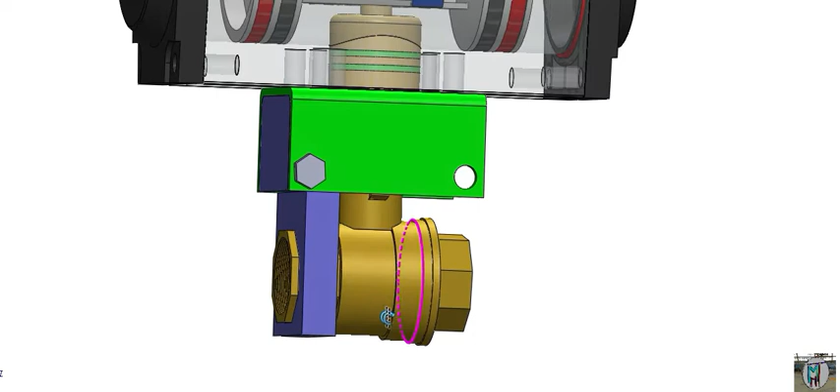Hello everybody. Last time we told you about one system of your valve, how to rotate the valve. We are talking about this valve. Last time we described all functions of this valve, and basically we use this valve in our PU machine. So now this valve will be rotated by one piece of equipment. We call it the blow down valve. You can see here, this is the blow down valve.

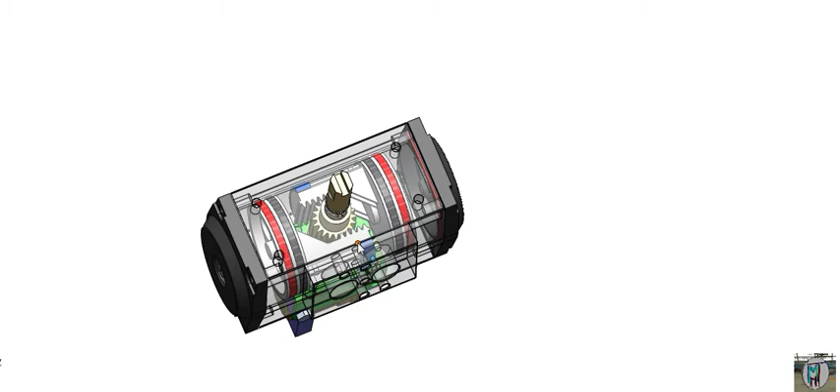When it rotates, now this is the perpendicular condition, 90 degrees, so at that time this valve will be closed. It will be rotated, so at that time you can see that your valve is opening there. So when it rotates, it will open and close like this. When air enters here, at that time it will work.

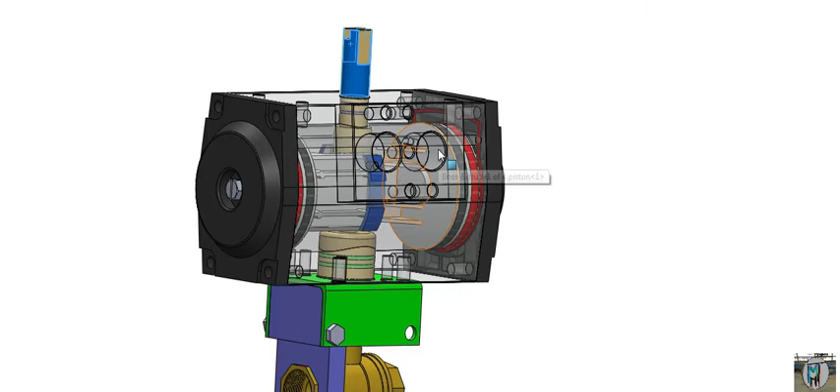So there are 2 points, one incoming and one outgoing, and also A and B points like this, if you know about the pneumatic system. The pneumatic valve we have already described in our previous video.

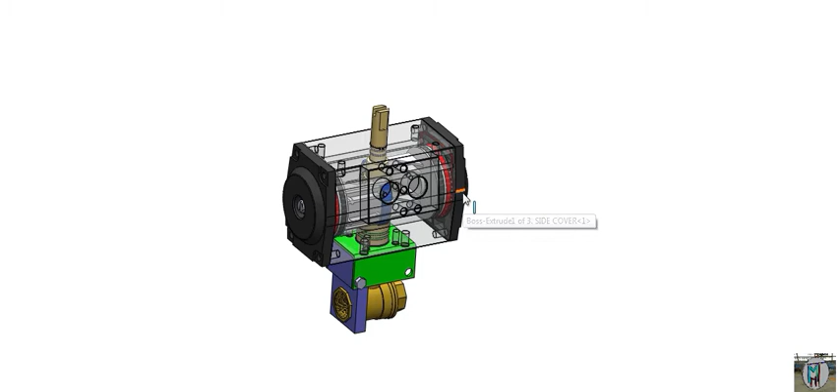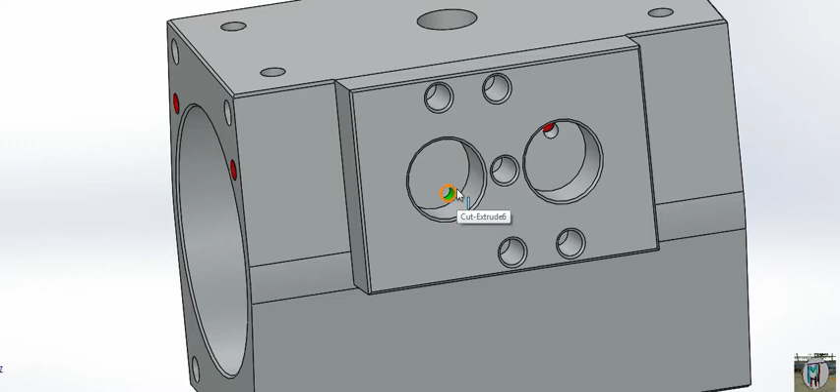So now we are starting here, this is the valve. How it will work, we will tell you now. This is the body of it. You can see this is the green signal, the A and B part where we will attach the connector through one pneumatic valve here. So this green signal is coming here. You can see that at the bottom, and also the red color.

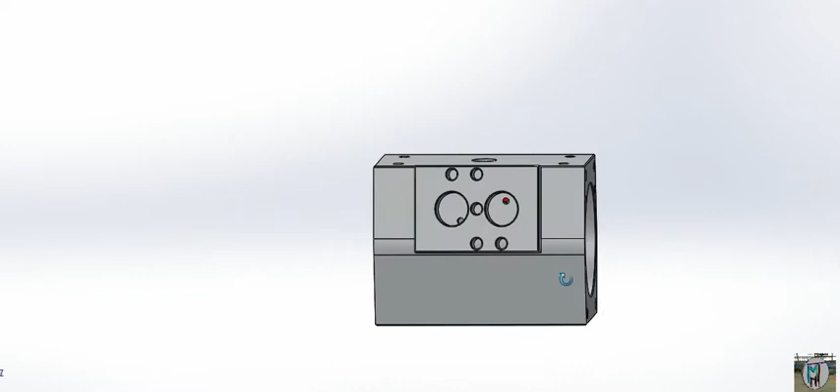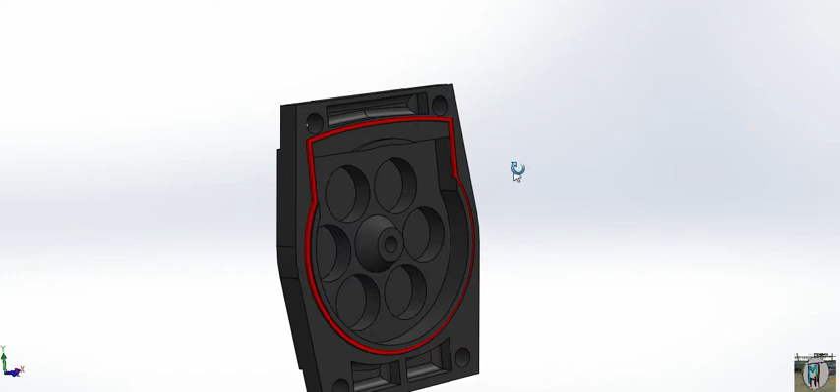So red color is basically the path. On the other side also you can see it goes throughout both sides. So when we give some pressure here, that pressure will appear on this side and also this side. This is the side cover of our blow down valve. Because this is the depth here, that gap here, when the red side is operated, air will come through that hole, it will appear here, and the pressure will build here.

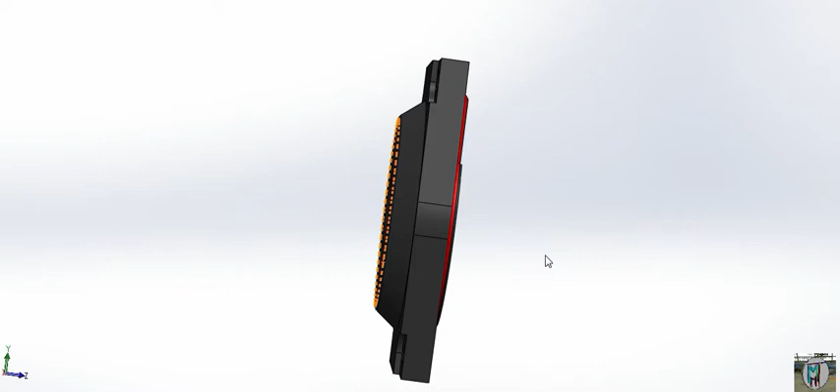And this hole is for adjusting. We will fix one bolt here to adjust our 90-degree angle, to stop, to set how much we want to open our valve, so we can set it through this bolt. Here we have fixed this bolt, you can see. Now we will start here.

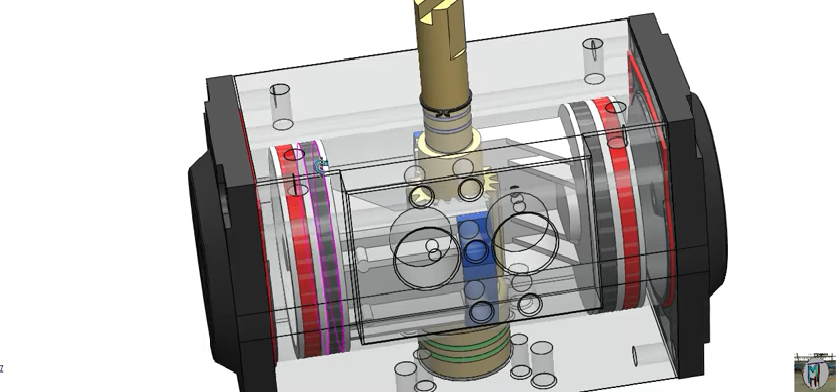So when pressure builds, suppose now the red color, this is the right-hand red color. So this is the ring and cylinder. You can see that this is the cylinder, and this is the ring and piston, like the way a pneumatic cylinder works. We already described all of it in our previous video on the pneumatic cylinder. We will give you the link also.

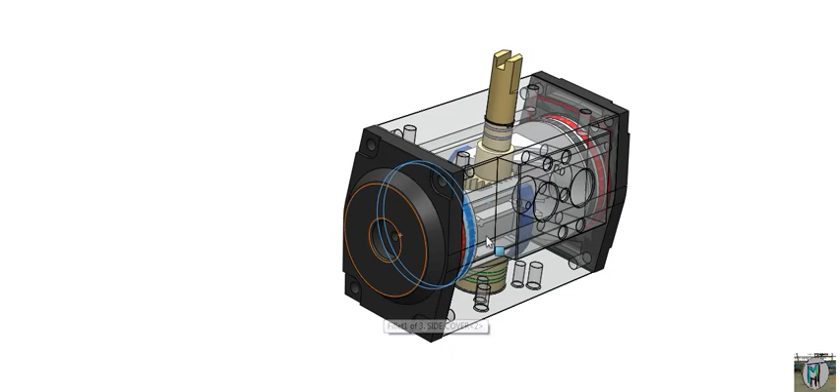So when pressure builds inside this portion, air will come and press this portion, so it will go inside, because the green point is here in the middle, so air will come through this. The air inside will go outside. When we give the pressure on this side, it will go outside. We can set the bolt. I have told you how much we want to open, how we want to rotate this, how much degree of rotation we want.

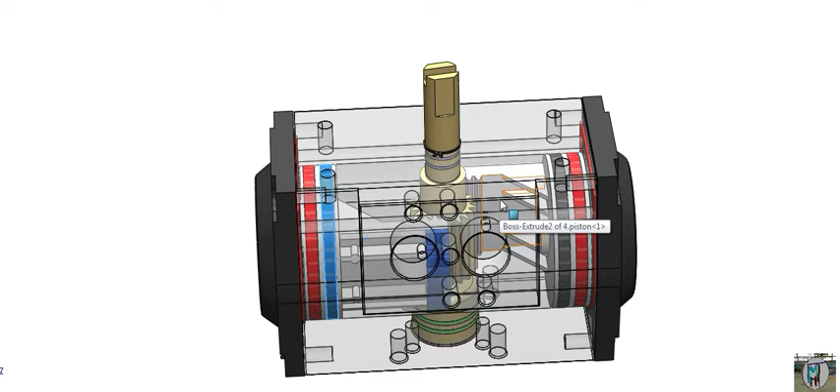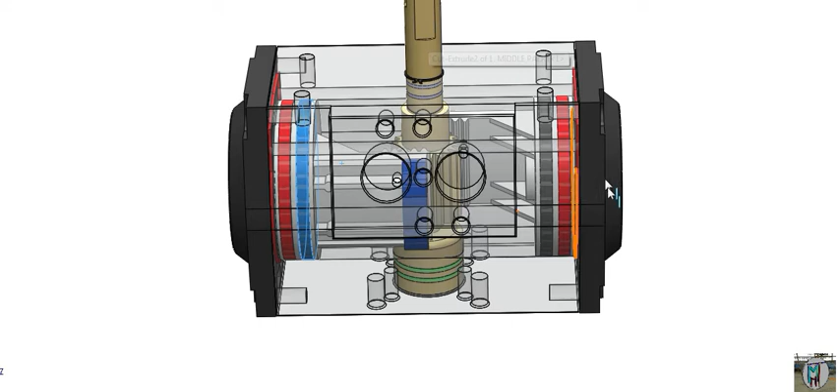And here you can see the rings are inside. Suppose your ring is damaged and air is coming here, you have to open only this and you can change the ring here. Also two rings are on the bottom side, where we will fix one coupling, so the ring is here also, so air leakage will not happen here. So when we give the pressure inside, it will rotate, and when we give the pressure on both sides, it will rotate through this piston also.

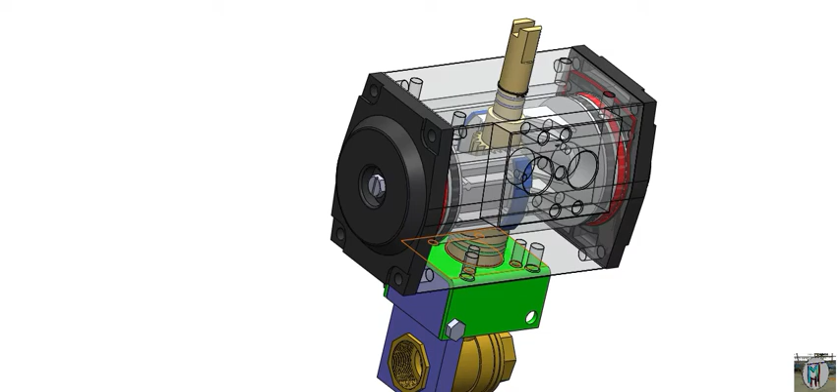So that is working only so that we can see here whether it is rotating or not rotating, so that this is working or not. Now we have fixed this fully with the support of the plate, and here you can see one coupling here and the valve, this is the valve.

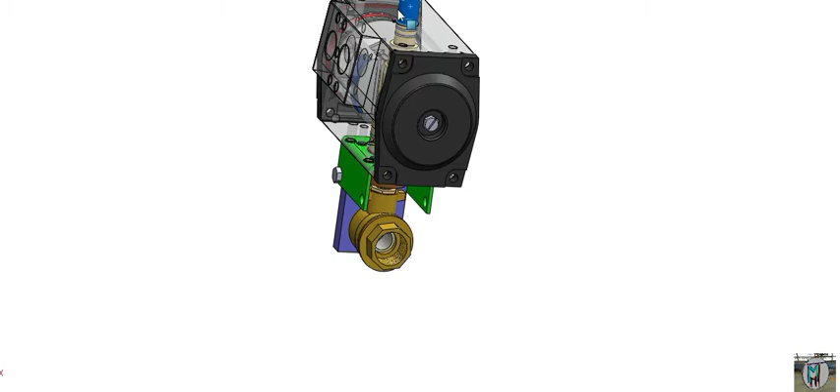So when we rotate this, you can see that this is going closed, and when it goes this way, it is open. At open time, it will be straight on this side. This means that this is open. When it is closed like this, at that time it is a cross section, meaning 90 degrees, it will be closed totally. So basically we use this valve in our head, the PU machine head.

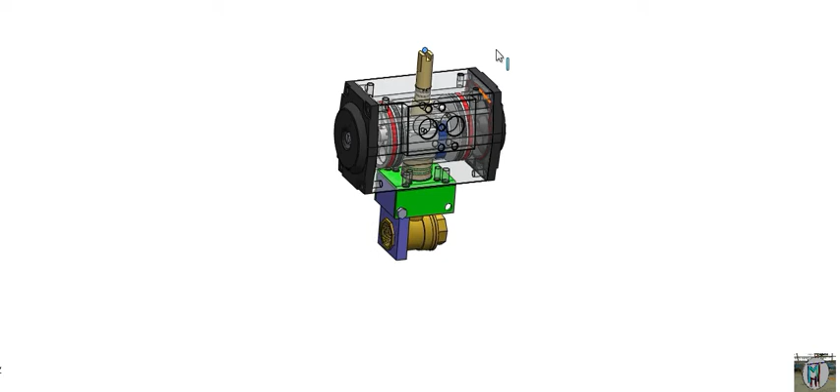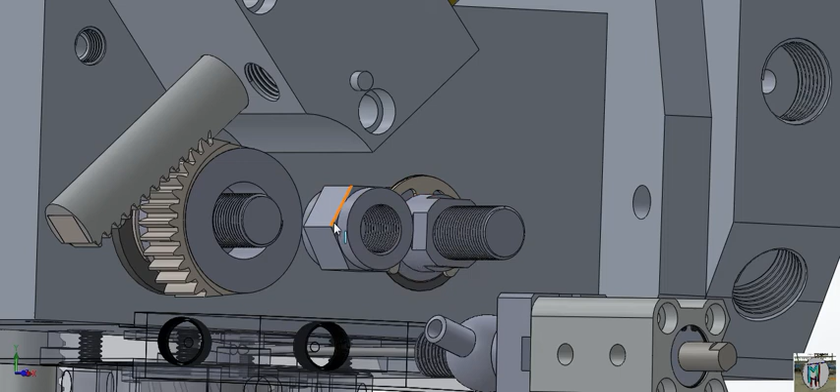So three of this type of valve we put in series, so that we get some chemical from that valve here, MCL valve, NRV. In our previous video we already described this NRV, with the ball inside, so when pressure comes here, the ball will move inside and your chemical will enter inside the head to clean your head.

What is the need of this? Suppose black color is running and you want to start your white production or brown production, or you feel that your cup or your product is not coming out very well, quality is low, then you need to clean after every round, after every 60 rounds, to clean this head, because iso and polyol are mixed here, so you need to clean that. So MCL will be cleaned with air pressure, so we need this.

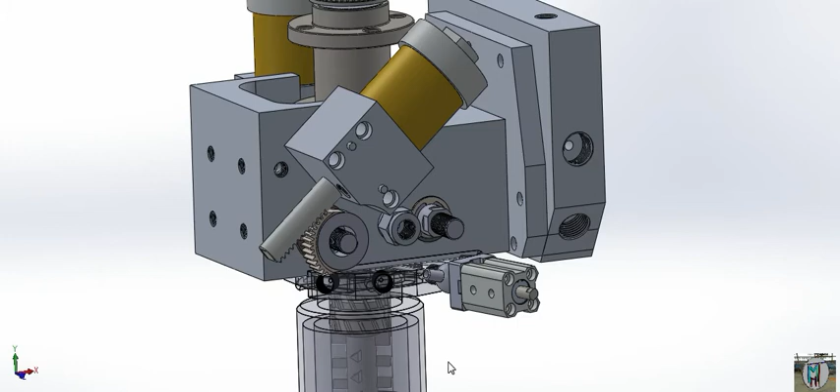So you have to watch this video also, and here you can see that this point will meet with the head. The chemical will come here and go to our head. What is the purpose of fixing this one? Because this is pneumatic based, we will fix our pneumatic valve 1 or 1.5 meters distance from this. When current enters the valve, the current will not be directly in touch with the chemical. Only our air pneumatic pressure is rotating this valve.

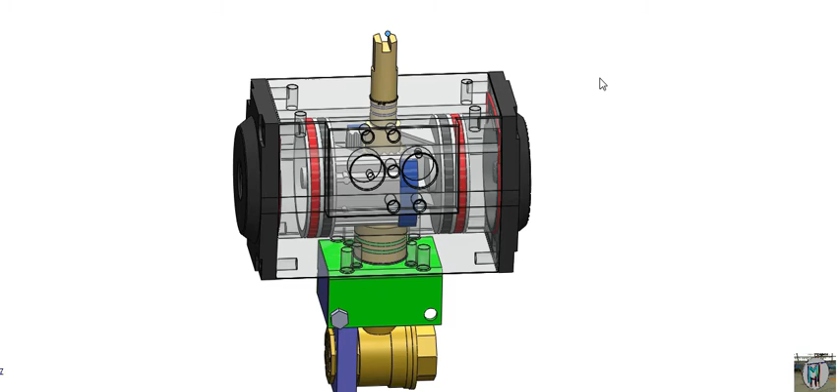So this is totally a safety point. The chemical is not in touch with fire or some spark or some voltage. So that is the benefit of this. This is the precaution when we use chemicals, that we have to use some equipment to rotate or to move forward, backward, but not by an electric circuit. So that is the advantage of this. So if we use this, we have to have knowledge about how it is working.

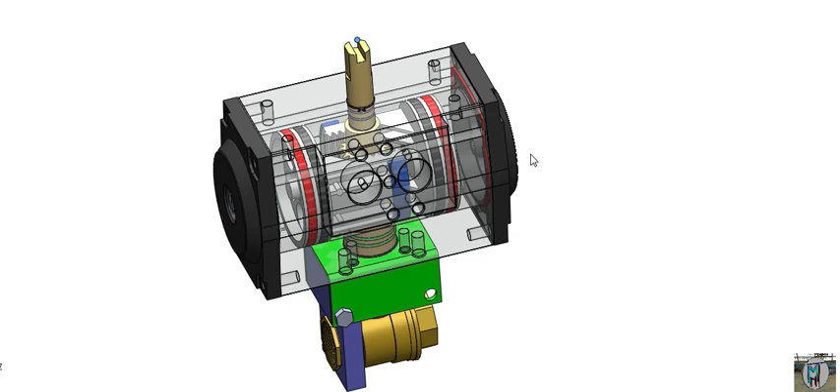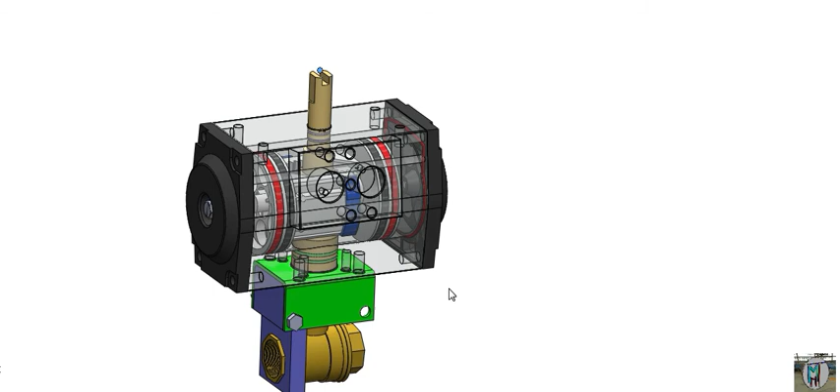Suppose that this is not working, and after 5 or 6 years you have to clean this. You open this easily, remove the 4 bolts on this side. We did not put the bolts, but you can open those bolts, and when it is removed, you can change your ring. It will be outside, so you can change your ring also. And suppose air leaks from here or the bottom side, you can easily change the ring. If you want, I can show you how we can remove all parts.

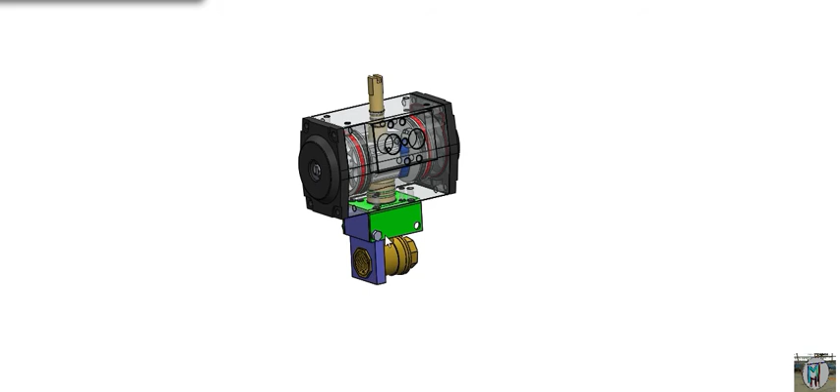We can remove this valve one by one, and also the full valve, because we separated all these things. So you can remove them one by one: open this bolt, remove this bolt, and after that you can remove this plate. The valve will come outside with this coupling also, and you have to remove this lock nut here. When the lock washer is done, all the plunger will come downside. You can remove this ring easily.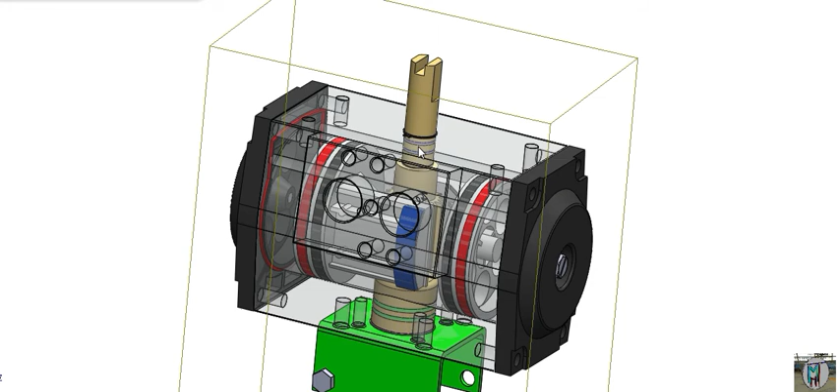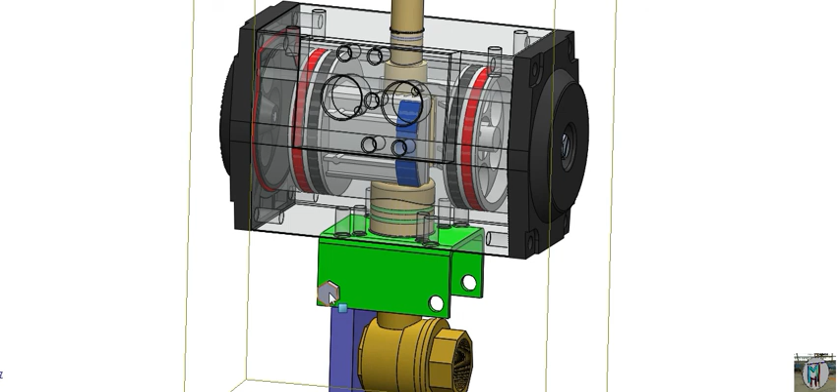And also to repair or replace this ring, you have to open this cover or this cover. Everything is easy, only based on the bolts here. Here it is somewhat complicated: you have to remove this ring lock washer, and also remove only one bolt and take all the metal outside. So that is very simple. Our target is only to tell you about all things, how we repair this and what is the working.